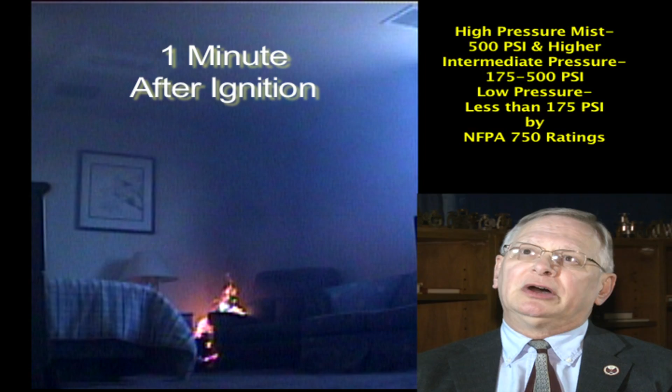So it's starting to address those issues that were with the residential standards. And with the low pressure water mist systems, the beauty of those is that they use readily, ordinarily available piping materials, copper, galvanized, or plastic, rather than having to use stainless steel high pressure piping. So again, the technology continues to evolve.

These new low-flow, low-pressure water mist systems, the amount of water that we need is significantly reduced, about 85%. Well, if you do the math, if I start off with about 300 gallons of water and reduce that by 85%, I am essentially down to a tank the size of a water heater somewhere within the structure, which is very easy to accommodate. Basically, another closet.

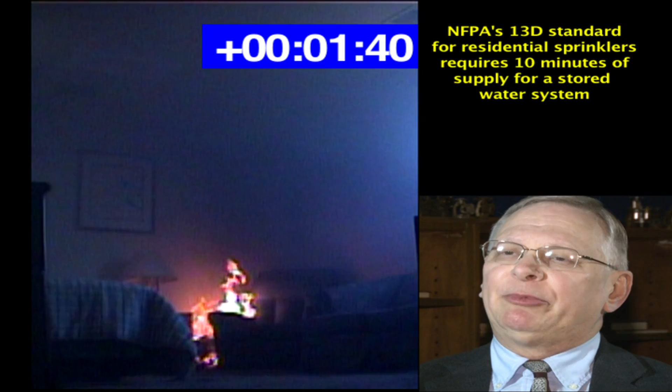Underwriters Laboratories did some very interesting tests where they constructed two burn cells that replicated a living room. One of those was what we refer to as the modern room, which had modern furnishings, purchased at modern outlets, which reflect what we build furnishings out of today. A lot of synthetic materials, polyurethane foams, etc.

The other burn cell, or other living room, was what they called the legacy room, which I jokingly refer to as Grandma's living room. And in Grandma's living room, they equipped it with furniture, carpet, drapes, etc., that were consistent with the 1950s, maybe a little bit into the early 1960s. Both of those rooms were ignited in the same way, a candle in the end of the sofa.

In the modern living room, that room went to full involvement or flashover in just a little under 4 minutes, which is what we typically see today. Grandma's living room, nearly 30 minutes before that room transitioned to flashover. So that fire growth is much quicker today. That heat release rate is much, much more rapid. So the environment deteriorates much more quickly.

And if we couple that with the concerns over lightweight construction, we end up with an environment that is jeopardizing the occupants much quicker, and because of the lightweight construction issues, creates firefighter safety issues. So what we need to do is to provide a way to control that fire event. The smoke alarm will give you early warning, but it won't do anything to control the event. That comes through the application of water, through a water mist system.

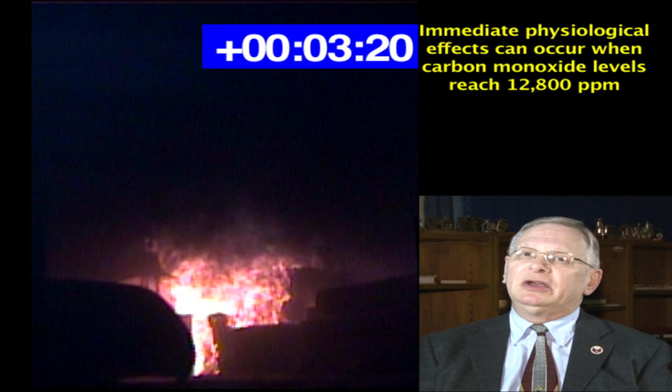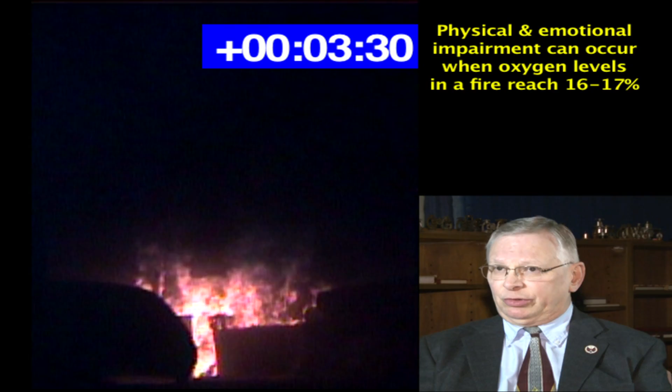We're able to control the effects of that fire early on, which means that we keep the temperatures at a level where they're not hazardous. We also keep the production of carbon monoxide, or CO, very low, so the environment is not toxic. And because the fire is suppressed early, the level of oxygen in the room is also kept almost unchanged. So therefore the environment stays what we call tenable.

Therefore we're increasing the amount of time that the occupant has to safely escape. If it protects the structure, as kind of a side note, that's kind of gravy. But our primary purpose is to give the occupant additional time to safely escape.